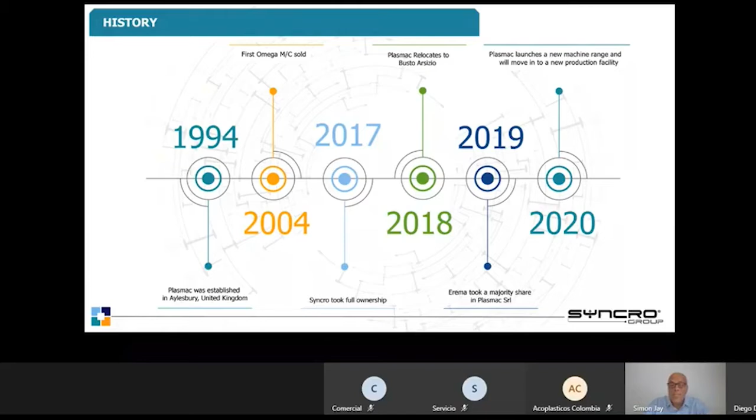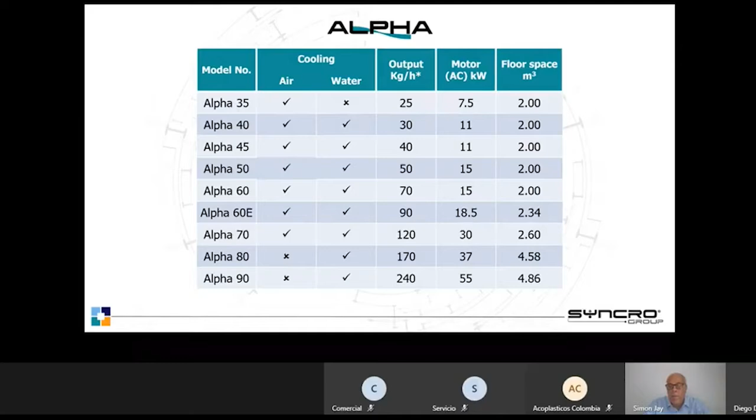In terms of our current product range, we have 2 machines: the Alpha and the Amiga. I'd firstly like to take you through the Alpha machine. The Alpha machine comes in a number of different sizes, from the Alpha 35 up to the Alpha 90. The Alpha 35 is an air-cooled pelletizing machine only. The Alpha 80 and 90 are water-cooled only due to their outputs, but the other machines in between can be either air or water cooled depending on the material we are repelletizing. The outputs go from 25 kilos an hour max on the Alpha 35 up to 240, 250 kilos an hour max on the Alpha 90, but we can also go down as low as 4 to 5 kilos on the Alpha 35. The machines have a very broad processing window.

All of our machines are based around what we call our dual diameter screw technology. This short screw technology has a number of different benefits. One of the key ones is the output per kilowatt of installed power, and we would typically expect to see an output between 3.5 and 5 kilograms per kilowatt, or 0.2 to 0.25 kilowatts per kilogram. Because of our screw design, we have low shear, minimum dwell time within the screw, and therefore the absolute minimal material degradation. It also means the machine has a very small footprint, saving valuable floor space. We call this a direct extrusion machine, meaning we don't need any prior size reduction before we feed the material into the screw. So as you will see on the top left-hand photo, we're feeding the roll material directly onto the screw as well as the trims.

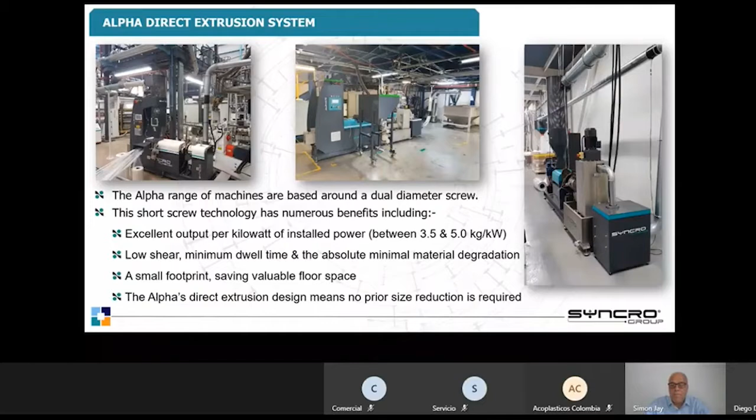We feed the material into the larger feed section. This allows us to get the material, which has a very low bulk density, into the screw. We then compress it through the taper section, and then go into the 8:1 portion of the screw, where we compress it further and then meter it up to the die.

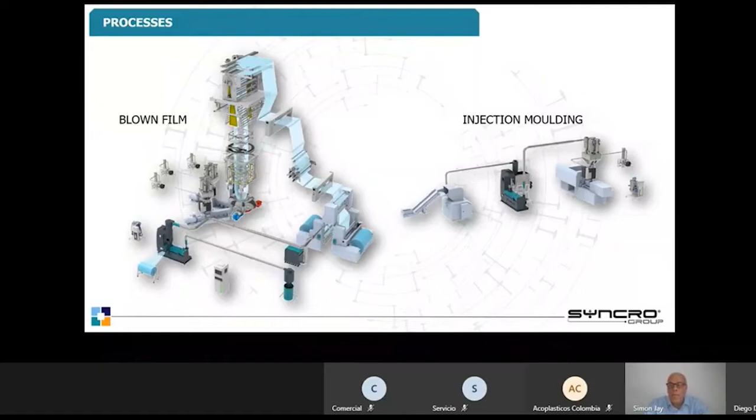The Alpha machines are typically used in blown film processes for inline reprocessing of trims and reels, and also in injection molding processes for either inline or offline applications, where you can feed the material into a granulator, repelletize it, and then feed it directly back to the injection molding machines. Over and above this, our machines are used on cast film lines. Alphas have been used to recycle pipe and many other different products.

I'd like to take you through a couple of case studies for the Alpha. The first is for a blown film application. This customer produced stretch film for both industrial and agricultural applications.

So they produce silage wrap for the agricultural industry and machine and hand wrap for the business-to-business industry. They're a well-established company within the stretch film market, and they've been at the forefront of development for many years.

They basically said to us that they needed a compact, efficient, standalone system capable of handling their trim and reel scrap. They ran trials at our factory and we proved the solution to them.

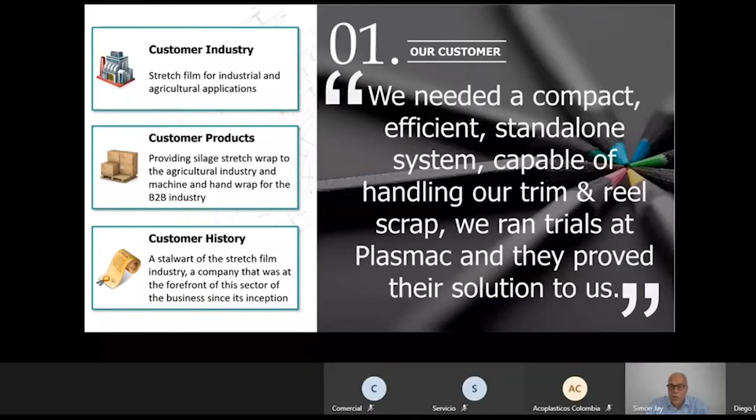The customer produces high-speed stretch film at speeds up to 150 meters a minute, and they were recycling this scrap using an older repelletizing line, which was producing a lot of dust and limiting their output. The dust from the recycling process was causing them housekeeping issues, and the output was limiting their line speed.

Added to this, they were looking to increase the reliability and uptime of their system. By replacing the equipment with a new high-efficiency, low-energy system, this meant that they could increase the output of their line and get their return on investment justified.

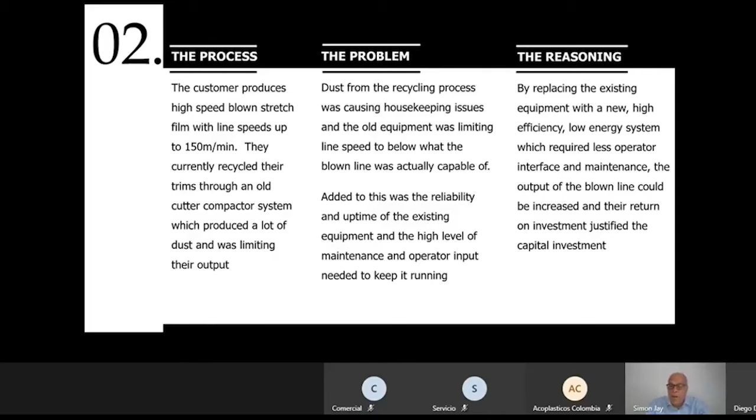Their goal was to reduce their downtime by 20%, increase their line speed by 35%, and increase their energy efficiency by 20%, whilst keeping the operator interface to a minimum.

What we proposed to them was an Alpha 70 air-cooled machine, an air-cooled pelletizer with a trim basket, a roll feed unit, a manual screen changer, and an air-cooled pelletizer. The customer typically ran metallocene with linear, low densities and LD blends, with or without PIB, and metallocenes with linear, LD and plastomers.

We installed the machine, we commissioned the machine for them, and we fully trained all of their shift operators and have provided ongoing backup and support since.

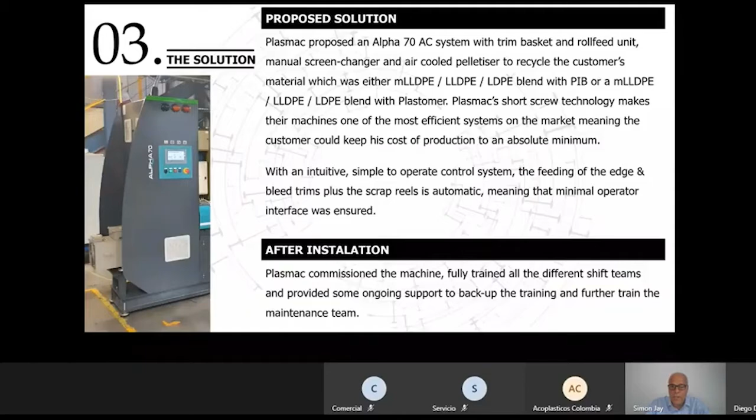Their feedback was that the Alpha machine met all of their needs and then some. The operators like it because they can forget about it, it simply runs, and Plasmac have gone above and beyond to support them, justifying their decision to purchase from us. But most importantly, the return on investment figures.

The customer had an output of 630 tonnes a year of scrap material. Their cost of production was 15 euro cents per kilo. So basically it was costing them 94,500 euros to recycle their scrap.

By investing in the new Plasmac machine, they were able to reduce their cost of production down to 11 euro cents per kilo, and they were able to increase their production by 395 tonnes a year, giving them a total saving of 98,000 euros. This basically meant that the machine paid for itself within 1 year.

Over and above this, they were able to reduce their downtime for maintenance, increase the blown line output, reduce their energy costs, improve their working environment, free up valuable floor space, remove the dust, and most importantly, increase their efficiency.

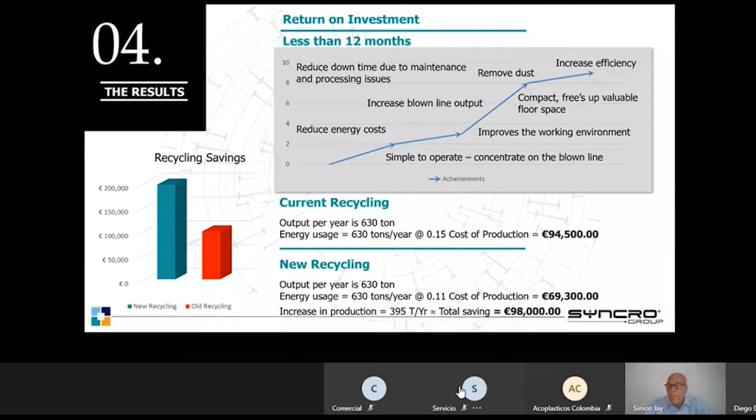The second case study I'd like to show you is from an injection moulding application. This customer supplied automotive parts to the automotive industry. They provided just-in-time products with zero defects, and they've been a supplier to their industry for over 20 years.

Purchasing the machine was a no-brainer, they told us, after proving the process, justifying the decision was easy. Basically, they were feeding all of their scrap material into a granulator, and this was either fed back directly into the injection moulding machines or sent away for pelletizing.

Dust from the granulation process would cause issues when they fed it back directly. It would cause bridging in the feed throat, or it was causing them defects on the surface of the product. They also had some metal clips that they couldn't always remove, and when this was shredded, they'd often get small metal contamination within the products.

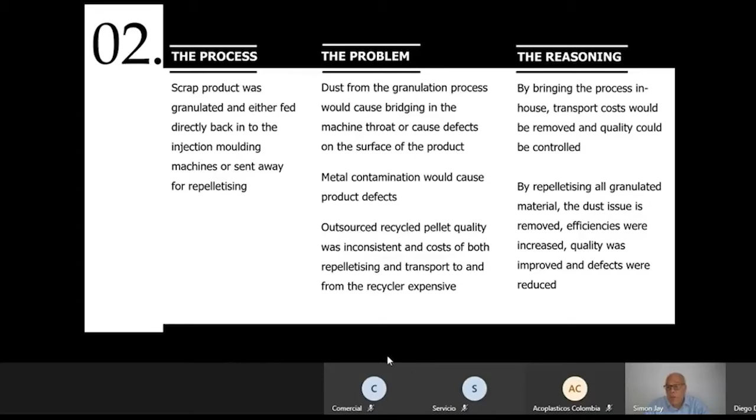The final issue they had was that the outsourced recycled pellet quality was both inconsistent, and it cost them a lot to transport and pay for this recycling. By bringing the process in-house, they hope to remove those transport costs and improve their quality, and by removing the dust, they can increase their efficiency and reduce their defects.

The goals that they set us were to increase their efficiency by 20%, reduce their defects by 15%, and reduce their recycling costs by 50%, again whilst keeping the operator interface to a minimum. Here you can see an example of the product that they actually injection moulded, which was the car dashboards.

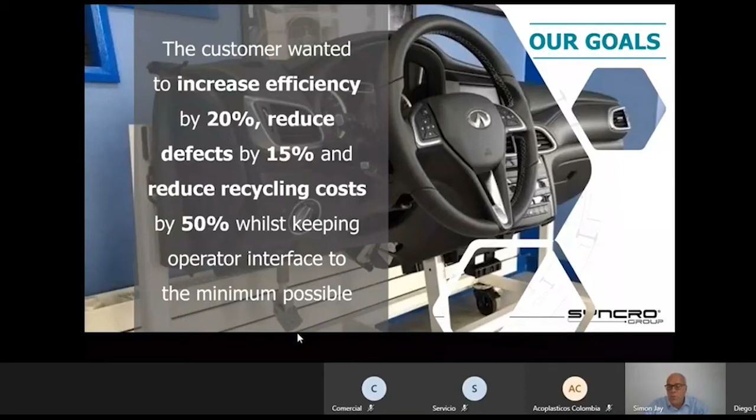Again, we proposed to this customer an Alpha 70, but this was a water-cooled system with a flake feeder, a manual screen changer, and a water pelletizer, as they run polypropylene with 30% calcium carbonate.

Again, we help to train their technical staff, we've provided them ongoing backup and support, and we give them further understanding so that they can give a seamless handover to their production team.

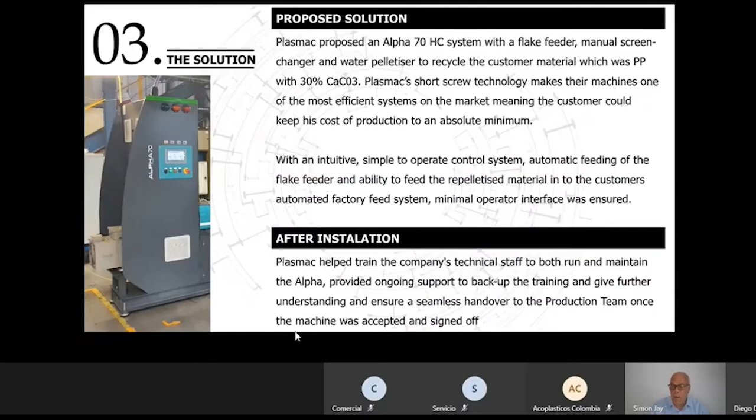Their feedback was that the Alpha machine exceeded all of their expectations. It's simple to operate, incredibly robust, and we can simply leave it alone to run. When we've needed support from Plasmac, they've been on hand to help and guide us for our issues.

The return on investment for this project was even more impressive. This customer was paying €350 per tonne to externally recycle 540 tonnes per year, costing them just under 190,000 euros per year to externally recycle. This didn't include the cost of transport.

When they brought the process in-house, their cost of production was 23 euro cents per kilo, which meant that their in-house recycling costs were 124,000 euros. This meant the machine paid for itself in less than 8 months. These cost of production figures include the machine cost, the electricity cost, the labour cost, and any finance costs.

The next product I'd like to talk to you about is our Powerfeed system. The Powerfeed system is a pneumatic trim conveying system to convey the trims from the winder to the trim basket. Plasmac takes full turnkey responsibility.

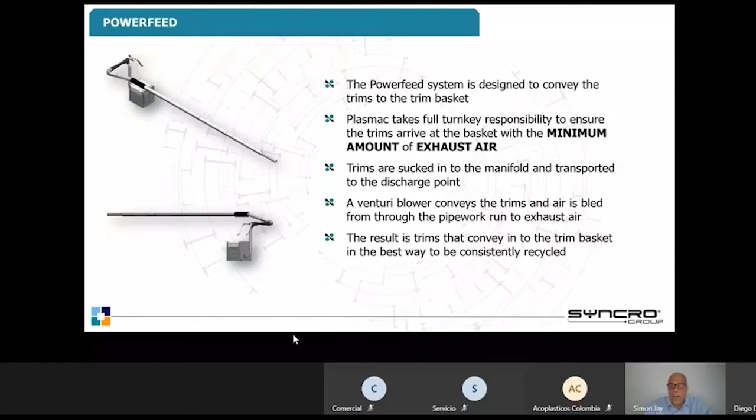Trims arrive at the basket with the minimum amount of exhaust air. Trims are sucked into the manifold and then transported to the discharge point, which is normally the trim basket. A venturi blower conveys the trims, and the air is bled through the pipework to basically get rid of the exhaust air. The result is the trims convey into the trim basket in the best way possible for us to then recycle it.

When used in conjunction with a Plasmac recycling extruder, we will remove the air through air diffusers as we go down prior to the trim entering the basket. Unlike competitive systems, which are basically just concerned with moving the trims from A to B, from the winder to the discharge point, Powerfeed is designed to deliver the trims with the absolute minimal amount of exhaust air. So Plasmac is the only machinery supplier that can offer a turnkey, integrated trim conveying and recycling package.

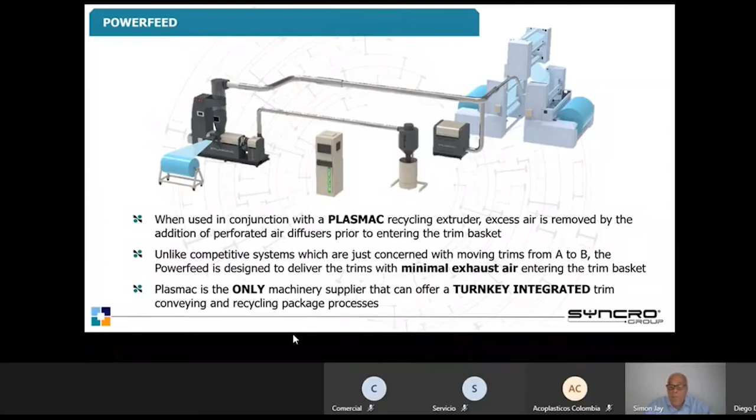Our second big product is the Omega Shredder extruder machine. This comes in 4 sizes. We have the Omega Eco, the 150, the 180 and the 250. The Omega Eco and the Omega 150 can be either air or water cooled depending on the material being repelletized. The Omega 180 and the Omega 250, due to their outputs, are water cooled only.

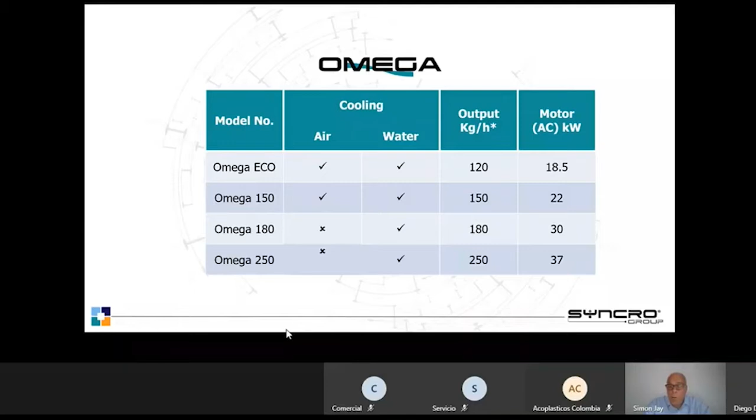The Omega machines are a one-step process. They're basically able to handle a very wide variety of different forms of scrap material. Using the same dual diameter screw as the Alpha, but with an enhanced geometry and a longer L to D ratio, they can basically handle any form of scrap - loose material, slabbed material, reels, purgings, startup scrap, raffia bags, any form of product.

The integrated shredder incorporates a unique screen design. It has a low-speed rotor and generates virtually no heat or dust, meaning the absolute minimum of gels. The size-reduced material is fed into the extruder via a variable speed auger, and again we have market-leading outputs per kilowatt of installed power, even below 0.2 kilowatts per kilogram in certain instances.

Again, because of the same screw design as the Alpha, it's low shear, minimum process dwell time, and the absolute minimal material degradation.

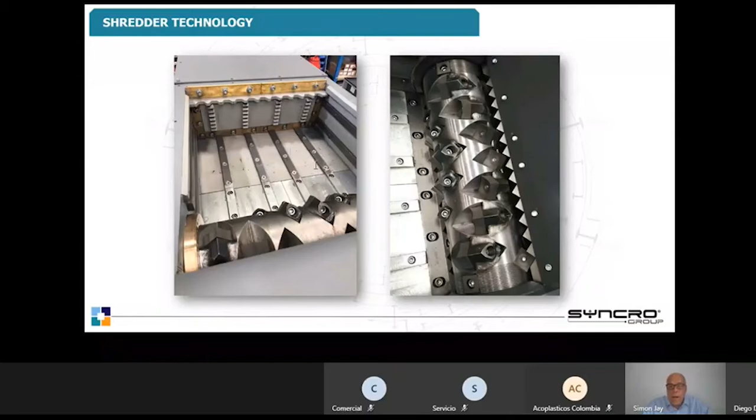These are 2 pictures of the shredder rotor and the fixed blades. On the left, you can see the shredder rotor and the ram. The ram pushes material onto the rotor, and is controlled by the load that we're measuring on the rotor itself. As the load decreases on the rotor, the ram will push more material onto it. On the right-hand side, you can see the rotor itself with the teeth and the 2 sets of fixed head blades.

On this slide, you can see the rotor above the feed auger. Basically, once the material has gone through the shredder, through the rotor, it falls onto the feed auger, and then we use the feed auger to dose the material into the extruder.

On the right-hand picture, you can see our screen design. Unlike a traditional shredder where you would have holes, our screen design has what we call a letterbox opening. We're simply shredding the material enough that we can feed it into the auger. We're not shredding it down into a very fine powder or dust where that would itself generate gels.

You'll also notice that there's no cooling water needed on the shredder at all. You can see here on the right hand side the taper barrel leading into the extruder. Absolutely no cooling water needed. This means again we can have an incredibly energy efficient machine.

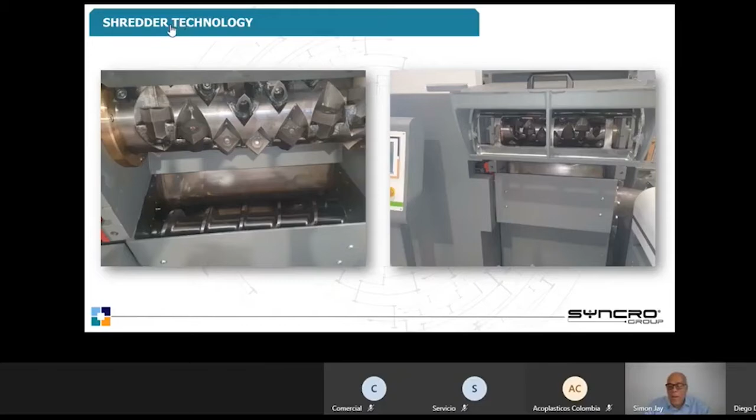We can put vacuum degassing on the Amigas, and we can also do this on the Alphas if necessary. Vacuum degassing would be used for printed material, or if there's some surface moisture, or if it's a biodegradable material which is hygroscopic, for instance. The degassing allows us to remove any steam or volatiles, and because it's a vented system, this means the screw length does increase, and this would typically be a 26 to 28 L to D ratio screw.

We also offer a range of screen changers, from a manual screen changer all the way up to hydraulic, manual backflush, or fully automatic backflush. If you're running an inline system, we wouldn't normally recommend a screen changer. If you have an offline system, or you're running reels on an Alpha, then we would recommend that a screen changer is fitted. For most applications, our manual screen changer is sufficient, but if a customer is running a more contaminated material, then we can happily offer the other options.

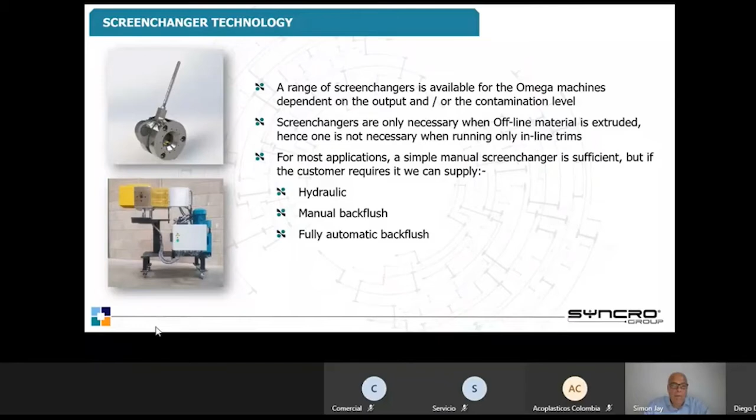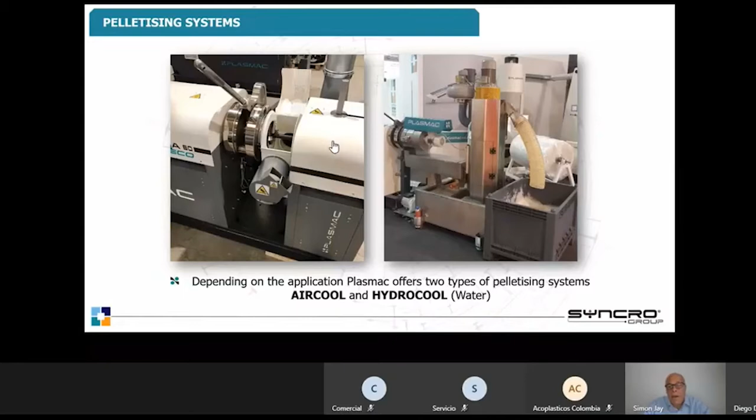As with the Alpha, we do 2 pelletizing systems. On the left, you can see our air-cooled pelletizing system, and on the right, a water-cooled pelletizing system. Amigas tend to be more commonly fitted with a water-cooled system.

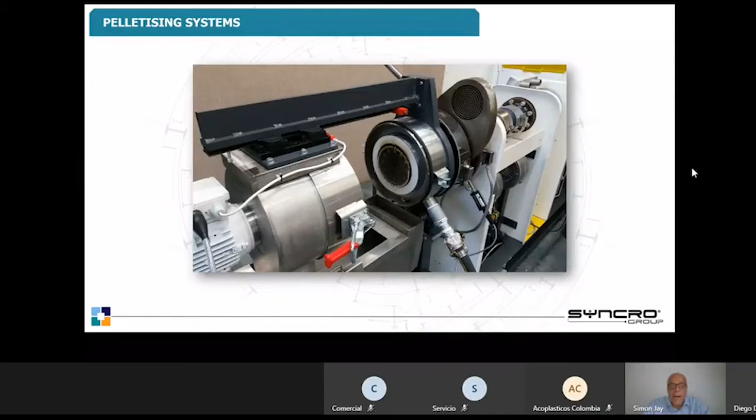Here you can see a good example of one. We have 2 pumps. One pump pumps the water into the collector where we do the pelletizing. The second pump pumps the water for a heat exchanger and into the tank to keep the tank temperature at a constant level. The collector is fitted onto a linear rail that you can see on the top for very easy opening and easy maintenance. It's a simple yet very robust system.

Again, I'd like to take you through a couple of case studies on the Amiga. The first was for a blown film customer that basically produces film for the construction and retail industries. They extrude, print, and produce bags in-house. They were established nearly 90 years ago. It's a family-owned business that concentrates on niche and specialty applications.

They needed a flexible machine to handle all of their scrap materials from startup to production scrap. They purchased an Alpha from us in 2015 that ran without issues, and their next step was to move up to an Amiga. The customer produced a lot of roll scrap, but also bag cutout scrap, and they were currently sending all of their material off-site for reprocessing.

Their brand owners were pushing them to include more recycled material into their products, so they decided to bring their recycling in-house. Their main issues were the quality of the recycled pellet that they were getting externally and the cost for pelletizing and transport.

The customer also wanted to run mainly roll films, and this was very high slip film. So they wanted to be sure that our roll feed would be sufficient to be the only way that they fed material into the machine. By installing the machine in-house, they could remove the transport costs and ensure their quality, and it also meant they could meet their brand owners' requirements of including a higher level of reclaimed material.

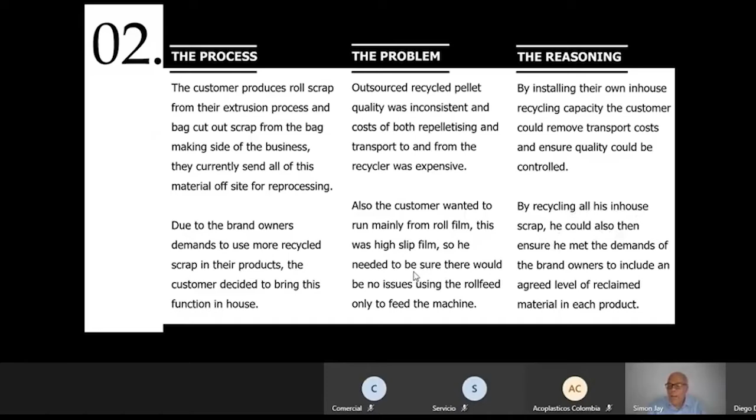This customer set us goals of reducing their recycling cost by 40%, allowing them to increase their recycled content by an additional 20%, and bringing their quality control in-house. They wanted a simple installation with a machine that required very little operator interface.

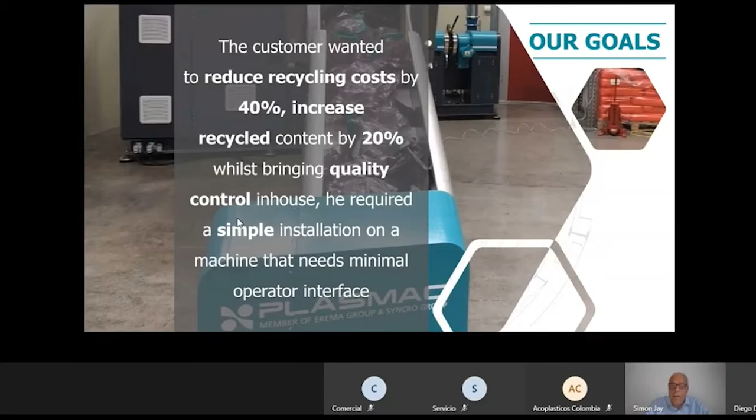For this customer, we supplied them an Amiga Eco air-cooled system with an elevator, an integrated metal detector, plus a roll feed unit. It had a manual screen changer and an air-cooled pelletizer. The customer mainly ran low density, linear low density with some metallocene blends, but they also added up to 10% polypropylene to improve the film properties. Again, we commissioned the line and fully trained the customer on the operation of the machine.

The feedback from the customer was that the Amiga machine allowed them to bring all of their recycling in-house. It's simple to operate - they can run it from either the elevator or the roll feed, but on most occasions the operator simply fills up the roll feed stand and leaves it to run. They were very happy with the original Alpha machine, and the Amiga is performing just as well.

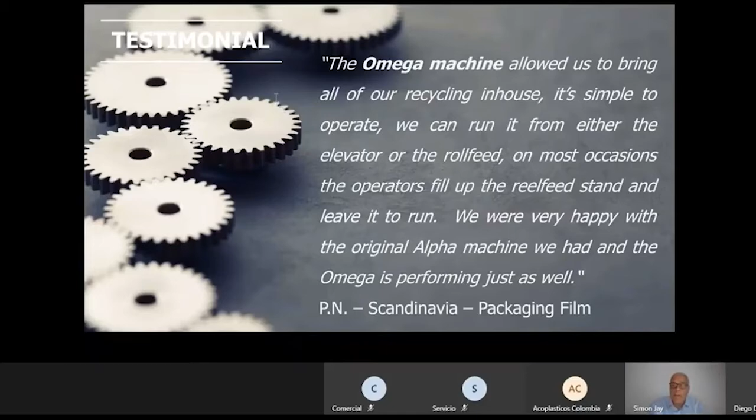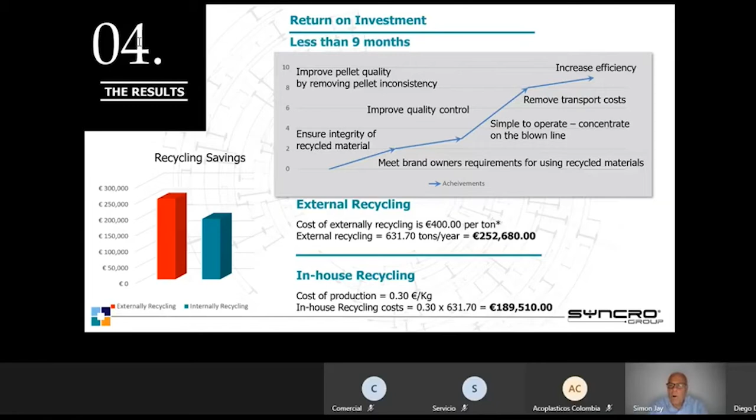The return on investment figures for this customer showed that they were paying €400 a tonne to recycle externally. They were recycling 631 tonnes a year, so this was costing them just over €250,000. By bringing the recycling in-house, their cost of production was €0.3 per kilo. That meant that they were paying just under €190,000 to recycle all of their material, meaning that this machine paid for itself in less than 9 months. They also were able to increase their pellet quality, remove the inconsistency, increase their quality control, ensure the integrity of their recycled material, but most importantly, they met their brand owners' requirements for using more recycled material.

The next case study I'd like to take you through is a laminated film case study. This customer provides packaging to the food and beverage industry. They provide barrier packagings as well as laminated packagings of polyethylene and aluminium. The customer was established in 1850. It has 8 manufacturing sites and over 1,800 employees. You can see their products on the right-hand side. This was basically 50% aluminium and either 50% barrier film or 50% PE film.

What they said to us was, as part of their commitment to the circular economy, they needed to find a system to allow them to recycle their high barrier film and the aluminium laminates. Plasmac ran trials and showed us that they could do it.

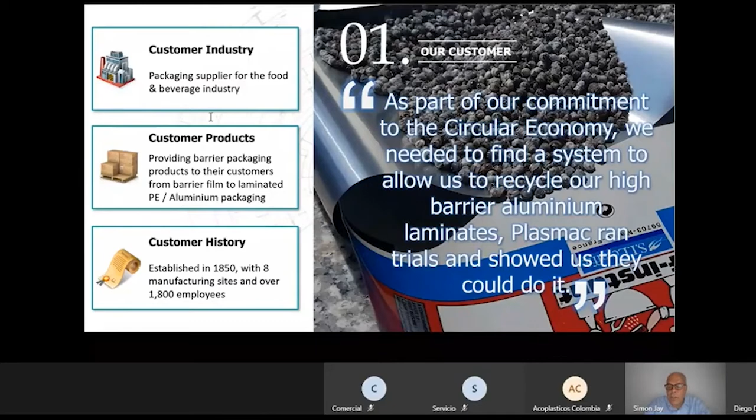The customer produces aseptic packaging by laminating aluminium to PE or to barrier films. They were producing startup reel scrap and out-of-specification reel scrap, which they were currently sending away to landfill. The customer, as part of its commitment to the circular economy, and also their major customer brand owners, were very keen for them to stop sending material to landfill, and they wanted to find a way to reprocess the scrap material in other applications. Up until this point, this material was considered unrecyclable.

The customer had found a partner in the injection molding industry, and they agreed to work together to find applications for the new recycled material. By recycling the material, the pair developed products that could incorporate a viable percentage of this polyethylene-aluminium recycled pellets.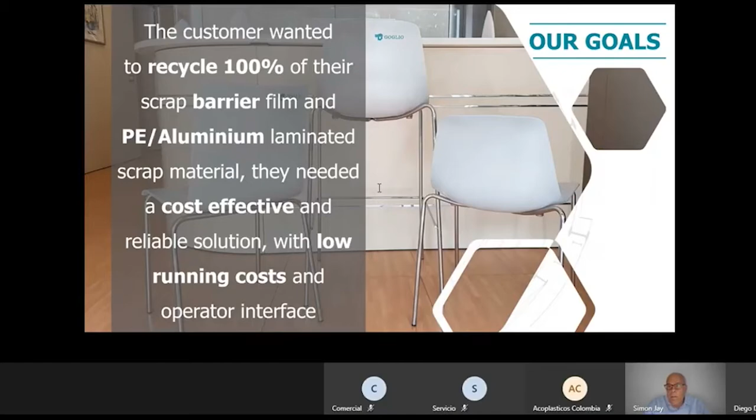The customer's goals were to recycle 100% of their scrap product, of their barrier film and PE-aluminium laminated material. They needed a cost-effective and reliable solution with low running costs. You can see a picture of the two chairs - the seating part of the chairs are injection molded from this recycled aluminium-polyethylene material.

For this customer, we proposed an Omega 250 HCV system with a roll feed and an elevator, a manual screen changer, and a water pelletizer to recycle the material, which is 50% PE, 50% aluminium. We helped train the company, gave them lots of ongoing support, and helped them fine-tune the material so that it ran perfectly in the injection molding machines.

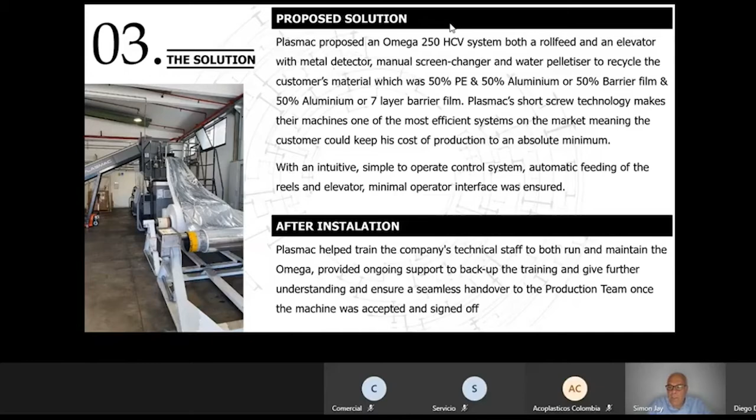On this slide you can see another product that they injection mold - these are end caps for their reels. They also injection mold pallets and the side panels that they put on either side of their reels when strapping them to the pallets.

Their feedback was that the Omega machine was exceptional. They're repelletizing all of their scrap material. It's simple to operate and very energy efficient. Thanks to Plasmac, they were able to meet the needs of their brand owner and reach the goals of a circular economy business.

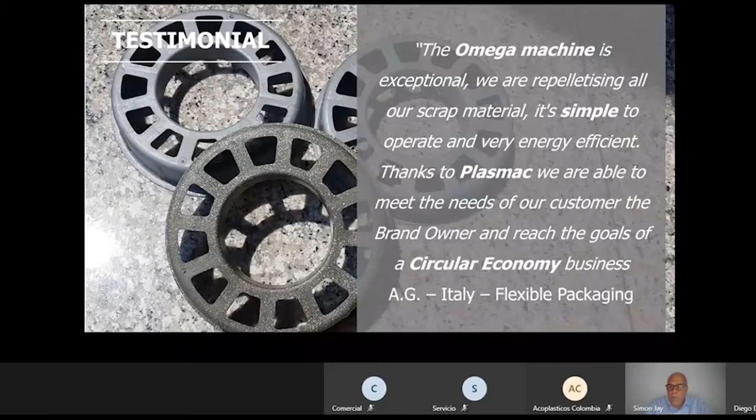These are a few examples of some machines in operation. The top left-hand corner is an Omega that's used by an injection molding customer.

The top middle is an Omega Eco water-cooled for biodegradable film. This customer is recycling all of the bag cutouts.

The top right picture is a bubble film manufacturer. They have an Omega Eco air-cooled and they recycle the reels or their trims.

The bottom left is a customer that takes startup scrap from all of the other blown film businesses within his area, and he repelletizes all of the material and uses it to produce garbage or can liners.

The bottom right hand corner is an Omega 250 that's actually installed in Mexico at JEP or GEPP, who are Pepsi Cola's packaging supplier. Here they have an Omega 250 and 3 Alpha 60 machines.

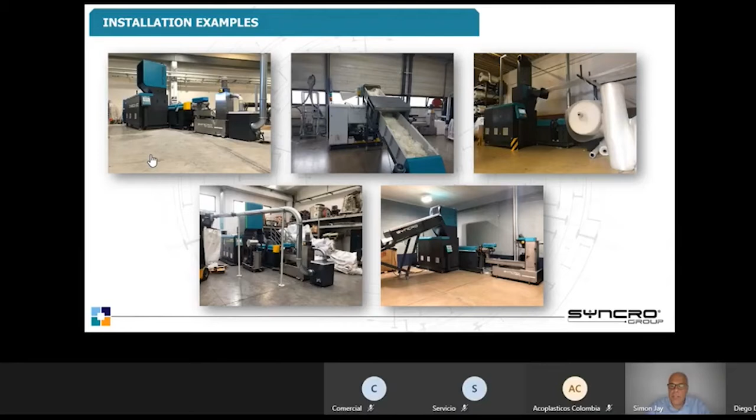Now I'd like to take you through some of the latest developments of the Syncro group. Syncro produce dosing units, both batch and continuous. They produce automatic air rings, supervisory systems, IBC systems, centralized conveying systems, and gauging systems for both blown and cast film.

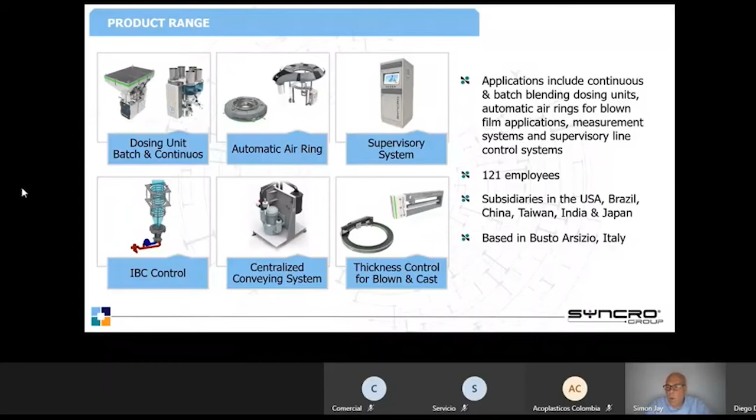They have 121 employees and growing, and subsidiaries, as I showed you earlier, all over the world, and they're based in Busto Arsizio near Milan, Italy. I'd like to take you through 4 of their products.

The first one is called SmartdraYn. A question is, how much does it cost to change the product on your extrusion line if you're making a product change from one to the other? How long does it take you to drain the material?

How do you handle that drained material? How do you keep the working area clean? How do you avoid blender contamination? How do you stop your material being lost? And how do you reduce your scrap production?

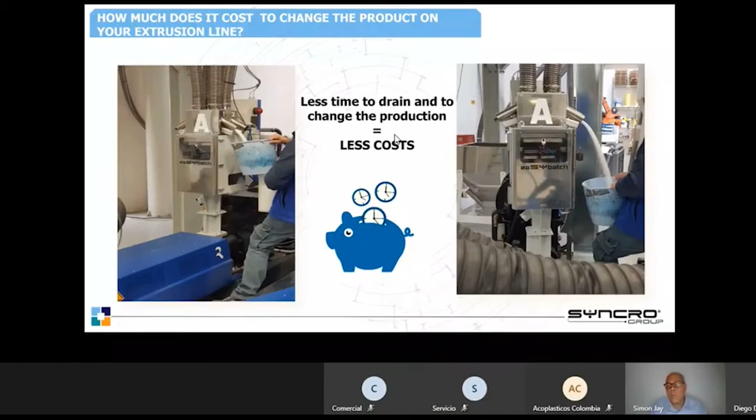The less time to drain and change the production basically means less costs, and it also means you have a more efficient machine because you're up and running more quickly. Also, by stopping material falling around the machines, you're making a much safer working environment for your employees.

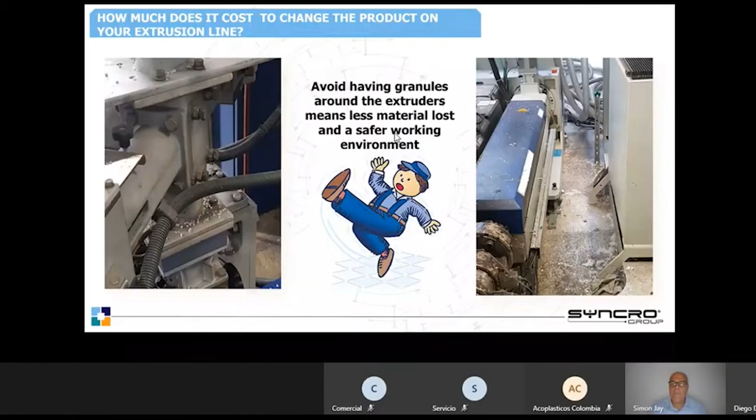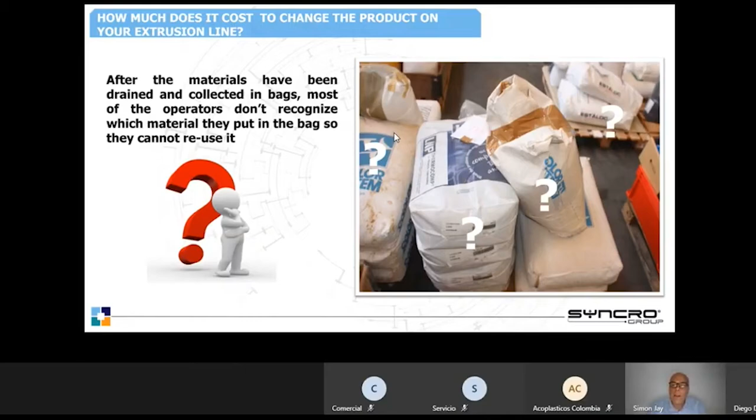One of the biggest issues, the operator drains each of the blenders or each of the components of the blenders, and they put it in bags or bins, but then they forget what material went into which bucket or which bag, and basically that material becomes scrap.

One of the key initiatives of the EU Circular Economy Action Plan is preventing pellet loss during the cleaning operation. Again, SmartdraYn is a fantastic system to allow you to meet the Circular Economy Action Plan.

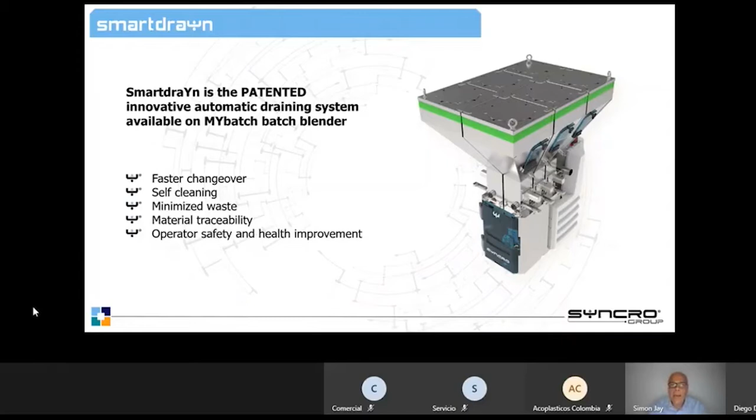SmartdraYn is a patented system from Syncro. It allows fast changeover, self-cleaning, minimised waste, material traceability, and an improvement in operator health and safety.

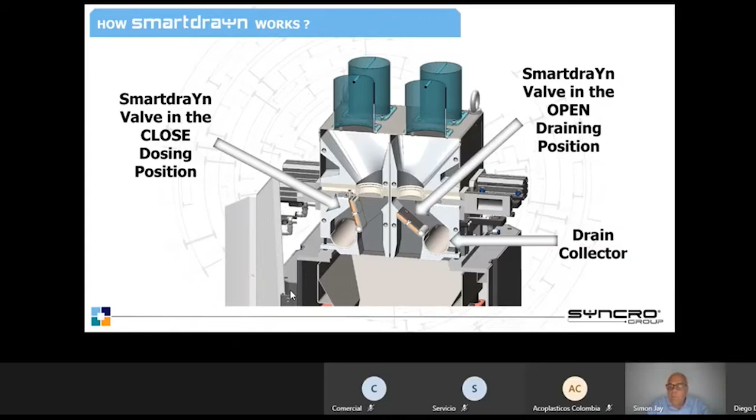Here, the blenders are draining into the drain collector, and a vacuum system then transports the material away to be bagged or put into day bins.

You can have single or multiple pickup points depending on the level of investment that you wish to make. A single pickup point basically would drain each extruder and its blenders in turn to a single pickup point. The operator, once one component has drained, would then swap the bag or the bin for the next one and drain that material directly into the bag or bin.

Or you can have multiple pickup points where you can drain all of the extruders at the same time. This makes for an even quicker changeover between products.

On each of the pickup points, there is a QR code printer. The QR code printer prints a QR code adhesive label. That adhesive label can then be stuck on the bin or the bag, so you have complete material traceability.

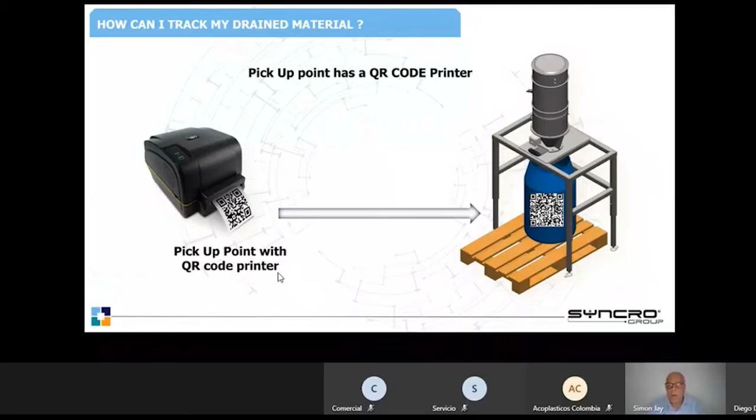If you're draining some of the additives that go into blown films, stabilizers, etc., these are incredibly expensive materials, and by avoiding having to scrap them by not knowing which they are, this means you get significant savings.

Looking at a return on investment example, if you did 300 product changes per year, you would save approximately 120 hours. The production over 120 hours on a medium capacity line could be as much as 72 tonnes per year. And if you took a 10% margin, that would give you a €7,200 per year return.

The material loss could be around 720 kilos per year. And the purge time savings could be as much as 24 tonnes per year. This would give you a saving on raw materials of over €37,000.

The cost of the SmartdraYn system on a 5 extruder, 4 component machine would be approximately €20,000, and with the savings of €44,000, that would mean the machine would pay for itself within less than 6 months. It would help you meet the circular economy goal of no pellets into the environment.

It would increase the safety of the working environment, it would save you raw materials, and it would increase your production efficiency due to quicker changeovers. Reduce purge times to swap products, and you ensure that there's no material contamination. Basically, it allows you to make more profit.

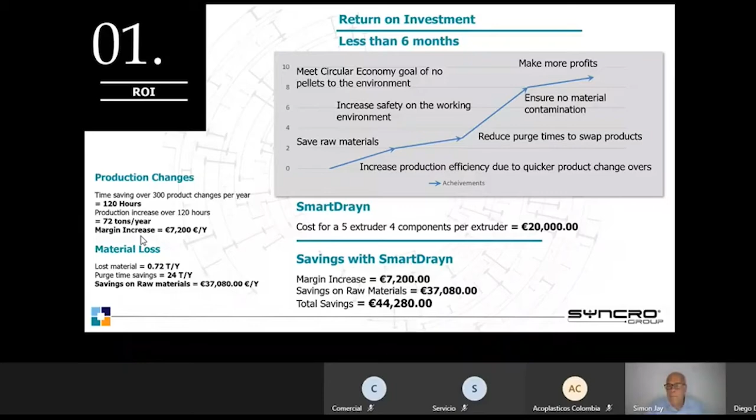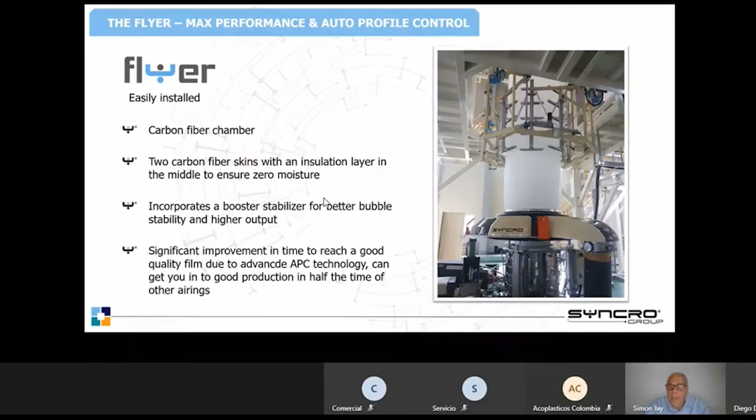The second product I'd like to take you through is the Flyer and the Vortex. The Flyer is a triple lip airing, a carbon fibre dual skin airing, which means because of the carbon fibre, you get no moisture generation due to the cold air that you're pumping into your airing and your IBC. It gives you a significant improvement in the time to reach a good quality film due to the advanced automatic profile control technology, and can get you into good production in half the time of other airings.

It's targeted at LD, linear, metallocene based films. As mentioned, it's a triple lip airing. Two of the lips are facing upwards, as in a standard dual lip airing design, but the third is pointing downwards, and with the unique IBC design, this gives you significantly increased outputs. This airing can go on die diameters from 60 to 850 millimeters, blowout ratios of 2 to 4, and thicknesses from 20 or below up to 160 microns. It has a vertical height adjustment of 450 millimeters.

Some examples of the products in production. So an FFS application, a die of 180 with a lay flat of 480 millimeters, 160 micron film. Here we would expect to see an increase in output of between 30 to 50%. If you were to supply Syncro your material recipes, they will actually put those output increases as guarantees in writing.

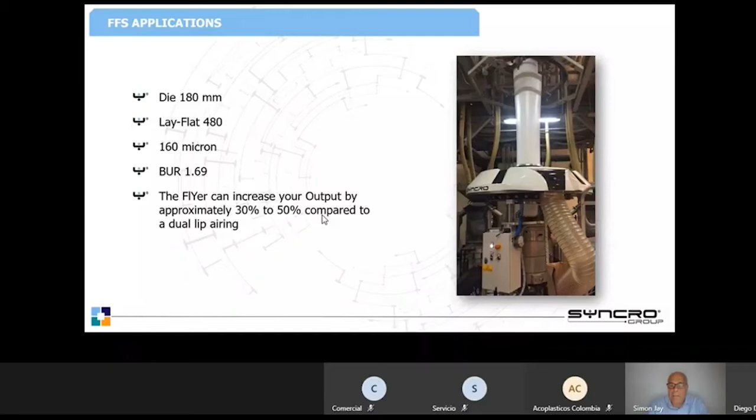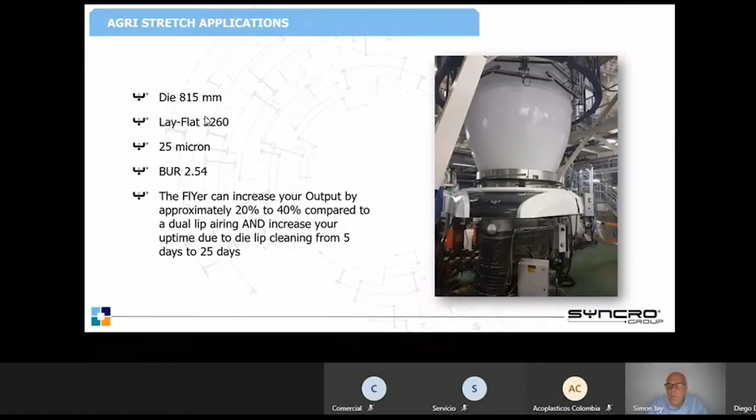An agri-stretch application is even more impressive. Here with an 815mm die, a lay flat of 3260 on a 25 micron film, you could see increases of between 20 and 40% in output, but the key one is that you also reduce the time required to drop the bubble to clean any PIB puddles on the airing inserts. This can be increased from 5 days to 25 days. So rather than having to drop the bubble every 5 days, you would only have to drop it just under once a month. This gives significant savings.

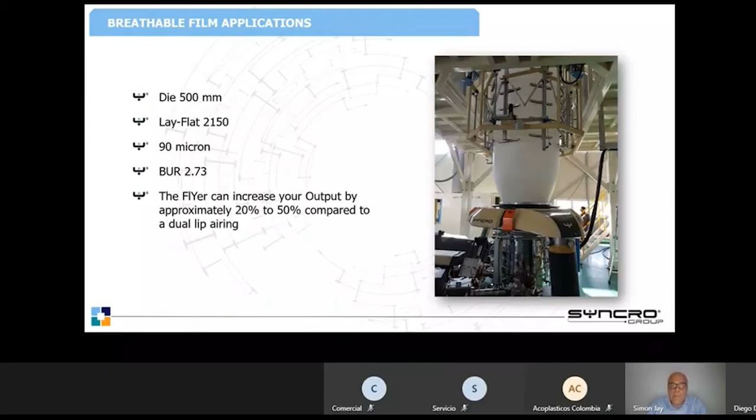For breathable film applications, a 500mm die, you can see the different characteristics there. Here you would expect to see a 20 to 50% increase. And for general purpose films, just taking a standard one of a 450mm die, 1800 lay flat, 55 micron, you can see anything between a 20 and an 80% increase in output.

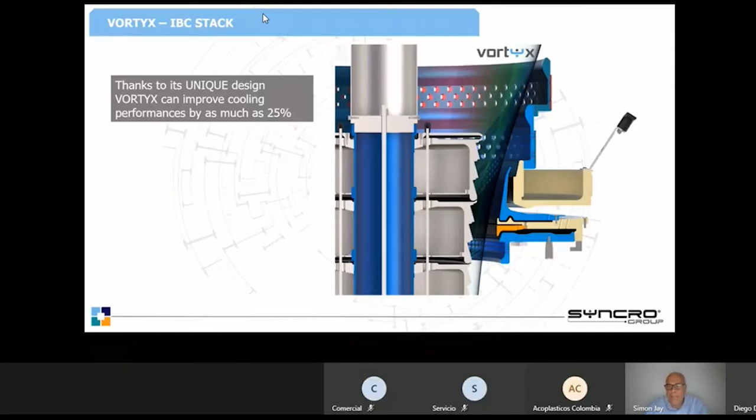What also comes with the flyer is the Vortyx IBC stack. This is a unique design that can also improve cooling performance by as much as 25%. On a standard IBC, air is blown onto the inside of the bubble, and this air will adhere to the inside bubble surface, and as the bubble travels up, that air will heat up and it will basically stick to the inside of your bubble, insulating it from the cold air that you're pushing in.

The Vortyx design has ridges up the outside of the stack, and this causes what we call turbulent microflows. These turbulent microflows break up the laminar airflow on the inside of your bubble, and basically mean that you're always pushing cold air into the bubble itself, into the plastic itself, and this gives you this 25% increase in cooling efficiency.

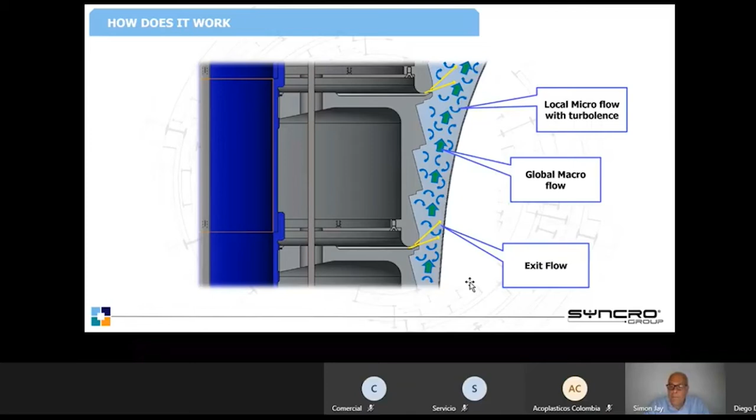Because we're causing this turbulent flow, this micro-turbulent flow will then cause any monomer drops that blow up from the die lips to basically be broken down into micro drops, and these are then exhausted through the IBC stack. Any monomer that does drop down towards the lips is then captured through a vacuum system on the bottom of the IBC and a foam insert, which basically will collect all of that PIB and stop it forming puddles on the bottom of your lip sets. And that's what allows you to increase the uptime from 5 days up to 25 days.

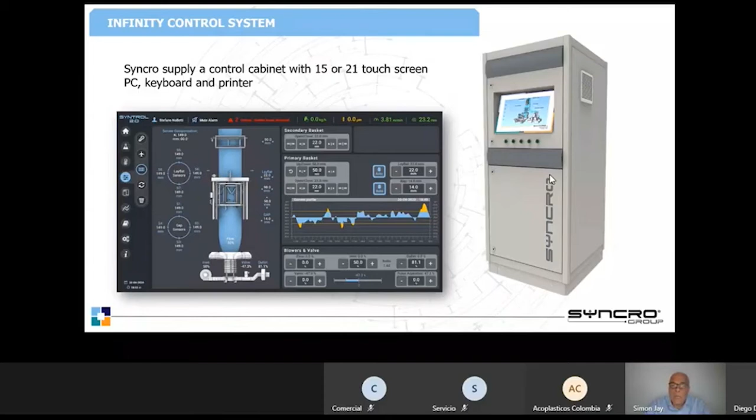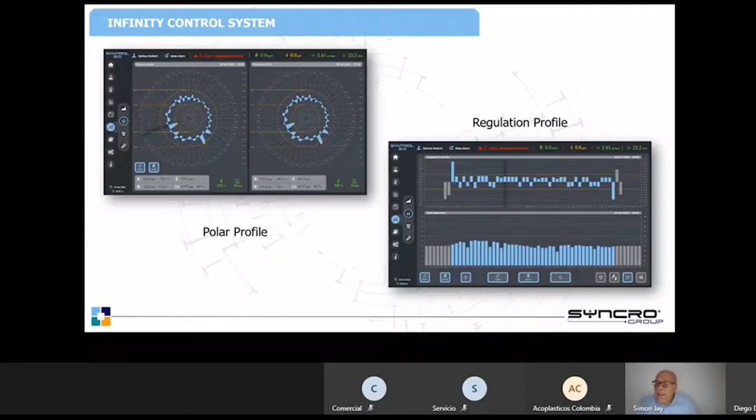The flyer and the Vortex come with a control system called Infinity. It's either a 15 or 21 inch touchscreen, PC, keyboard, printer, and as with all control systems, you have all of the functions that you need to run the line: startup profile, actual previous, 2 sigma trends, polar profiles, the regulation profile of your APC system, your temperature control for your line, and your dosing recipes.

With the flyer, we found that you could increase production on a mid-size line from say 550 kilos an hour to 710 - that's a 30% increase in output. That would give you 960 tons a year of increased output. If you took a margin on that of 10%, that would equate to 96,000 euros. The time to reach good production is taken down from about 30 minutes to 15 minutes. This would give you less scrap material worth significant annual savings.

If you took that scrap material as having a 50% value of virgin, that would save you 32,000 euros a year. The cost of a flyer, Vortex and the control system is approximately €120,000, meaning that system would pay for itself in a year.

The key there is less production scrap equals less wasted material, a clean, safe working environment around the die due to the single chamber inlet for the air. You save raw materials, you increase the production output of your line, basically you make more profits.

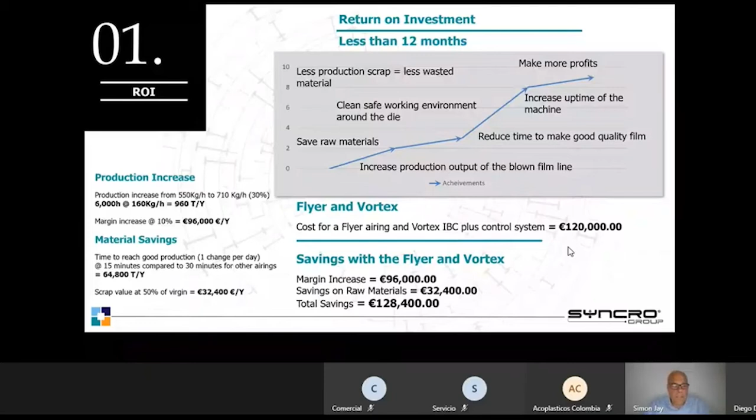The next product I'd like to take you through is the iron flat. There are three key features to high quality film. Profile distribution, or 2 sigma, this is improved by your automatic profile control system. Width tolerance, this is improved by your IBC with lay flat control.

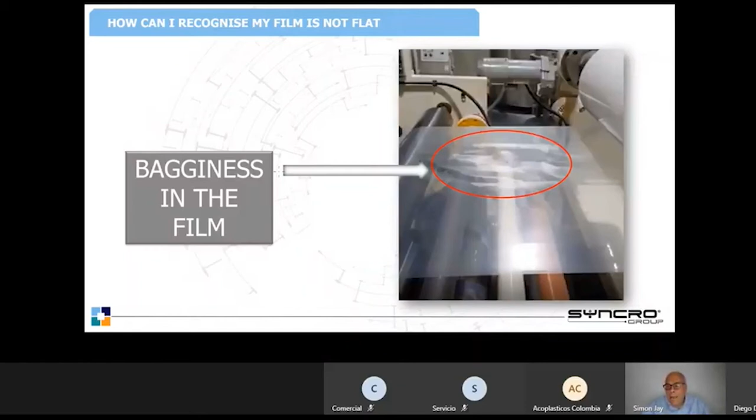We have what we call the iron flat. The iron flat we consider to be the third revolution in blown film design. The first revolution was oscillating haul-offs to randomise thickness errors. Then came the automatic profile control to improve the gauge control on the blown lines.

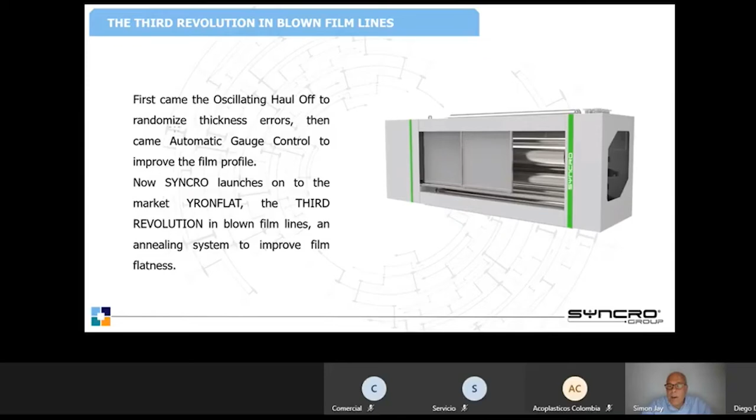We now consider the YRONFLAT to be the third revolution, and this is basically an annealing system to improve film flatness. It's a standalone annealing system for blown film lines, and basically it improves the film flatness, reduces camber, and allows you to increase printing speed, printing quality, and lamination performance.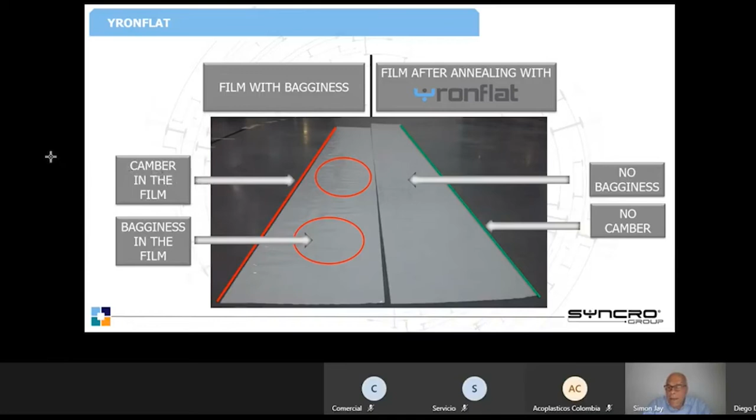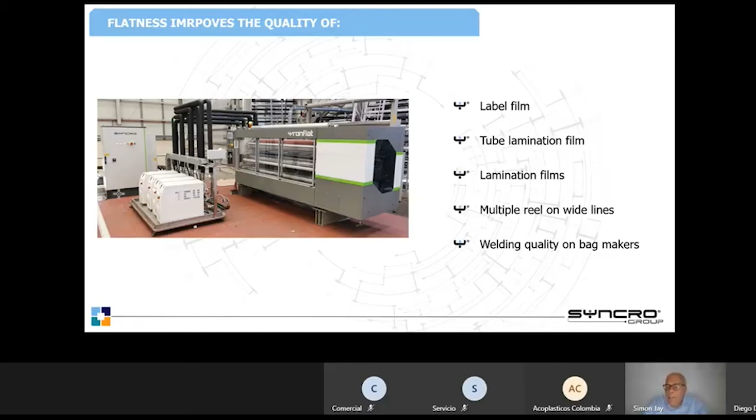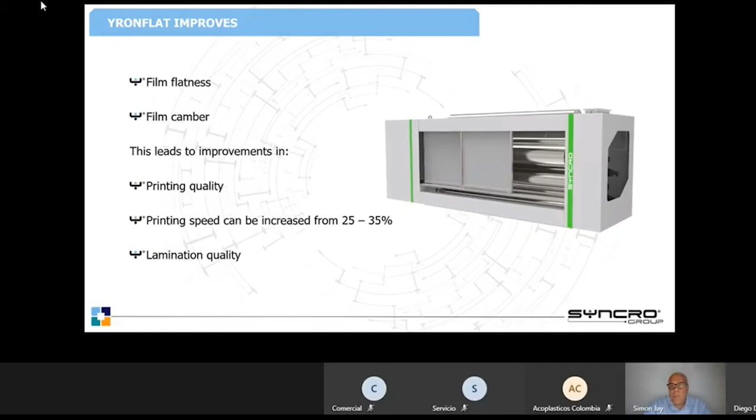A Yronflat is great for label film, for tube lamination film, for lamination films, for wide lines with multiple reels, and for bag making film, for the welding quality on bag makers. Basically, it improves the film flatness and camber, and this leads to improvement in printing quality. Printing speeds can be increased on your printers by 25 to 35%, and it increases lamination quality.

The key features: it has a semi-automatic web threader. The operator uses a chain to feed the film through the system. It has 4 thermo-regulated motorized rollers. It gives you maximum flexibility for preheating, stretching and cooling. The inlet can be either horizontal or vertical, and it has a fully adjustable cord length or stretching gap.

That you control via the software and recipe storage. There's no negative influences on the profile because there's minimal stretching, and it's available for film widths of 1200 millimeters up to 3000 millimeters. Here you can see an example of the inlet being vertical or horizontal, and the outlet also being vertical or horizontal.

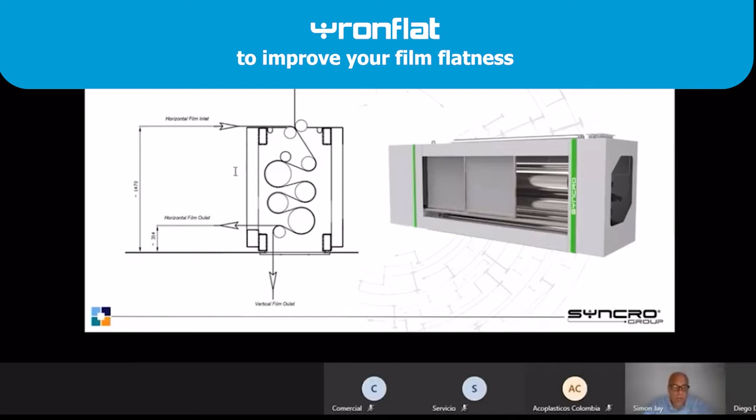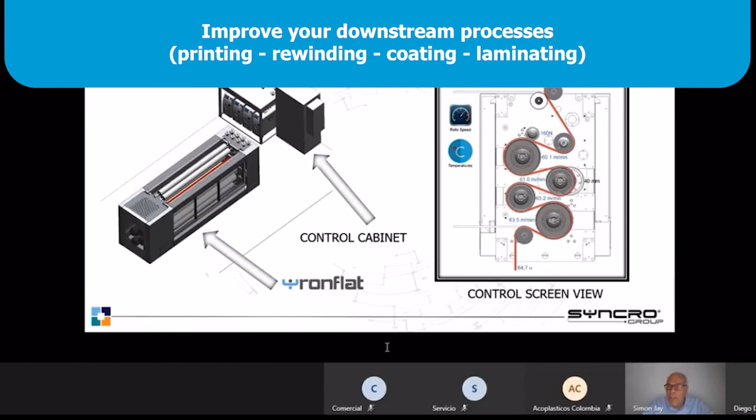And here you can see the key components. You have the 4 TCU units to control each roll individually for temperature. You have the control cabinet and the Yronflat itself. And on the right hand side you can see a control screen view where you can change the temperatures, the speeds, etc. to give you the orientation that you desire.

The final product I'd like to take you through is our EYES system. So the EYES is Syncro Group's web inspection system. This is able to detect all forms of defect that may occur during film extrusion, film converting or non-wovens. The EYES guarantees 100% detection of surface defects for all film types, i.e. transparent, opaque, coloured, and it can run up to 1000 meters a minute and resolutions down to 25 microns.

The EYES system allows the producer to improve their film quality by removing or detecting film contamination and providing a premium quality product to their customer.

These are the types of defects that you would be able to detect, so fish eyes, bright gels, paraffin or splashes, insects, scratches, die lines, bubbles, holes, particles or wrinkles.

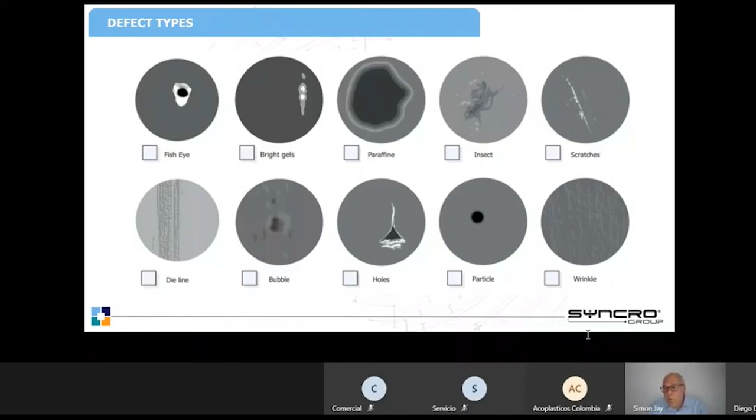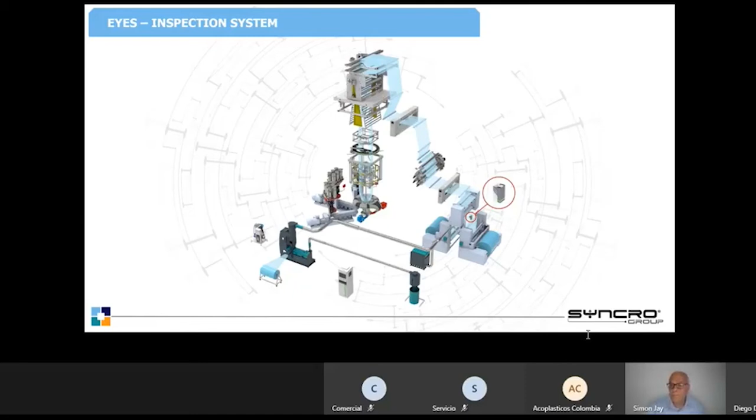The final thing I want to talk to you about is service. I'm a firm believer that the salesperson sells the first machine, but your service and support sell all your subsequent machines. One of the things that Syncro can offer is our spares on the web package.

Every single machine that the Syncro Group sells has its own unique QR code. When you scan that QR code, you go directly into the Syncro Hub, our dedicated web portal. Once in the hub, the customer will have direct access to their machine, allowing them to download manuals, electrical schematics, maintenance tutorials, plus they can select any spare part they require and will directly email them a quotation.

When the customer enters the hub, they'll go into their profile. Here they'll be able to select the machine that they wish to investigate, if they have multiple machines, for instance. Then they can drill down into that machine. This will tell them the serial number, when they purchased it, the hours of assistance they've had so far, and the pieces that they purchased, so the description of the equipment plus any attachments for that equipment.

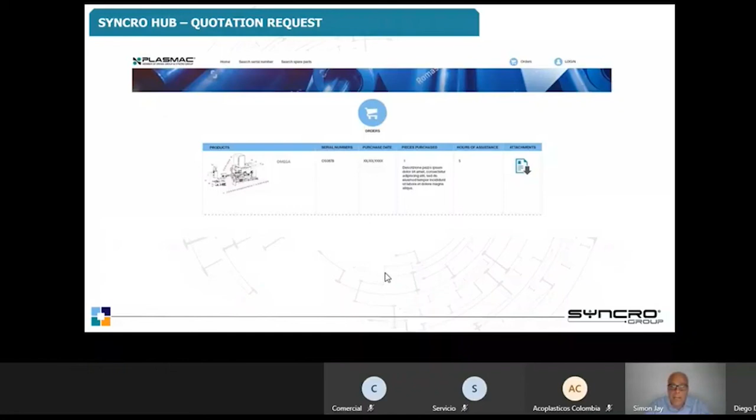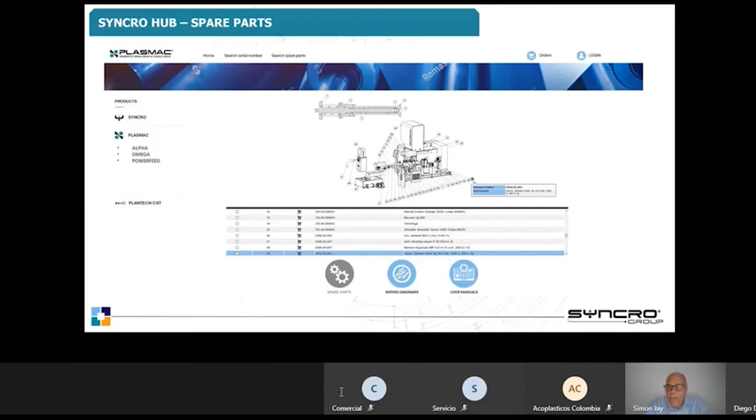And then when they drill down one level further, they can actually go into exploded diagrams of each and every component on that machine, so they can identify the exact spare part they require, and they can then put that into their order basket and order it directly from us.

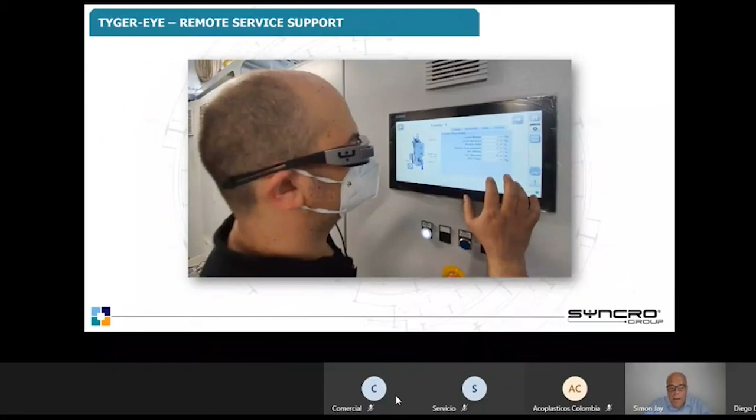The other product that we've just launched, driven primarily by the COVID situation, is remote service and support. How can we support our customers in these difficult times? Basically, we have a remote assistance software package designed using smart video glasses. This allows the customer's technical team or operations team to link directly to the Syncro group experts.

Information and instructions can be passed visually and verbally by a two-way system, and we can basically remedy even the most complex of issues. The remote technicians can even send documents and user guides straight to the inside of the smart glasses, so the operator will physically see instructions appear, literally like a heads-up unit appearing directly before their eyes.

What it allows us to do is live video and audio streaming over and above the glasses. You will also wear earplugs so that we can talk to each other. It allows us to share documents and images. We can instant message, and we can do video recording.

We can capture images and screenshots, and we can even highlight parts that we need the operator or maintenance manager to look at. So we can take a screenshot, draw a circle around it, and say please check this contactor, please check this display on the inverter, for instance.

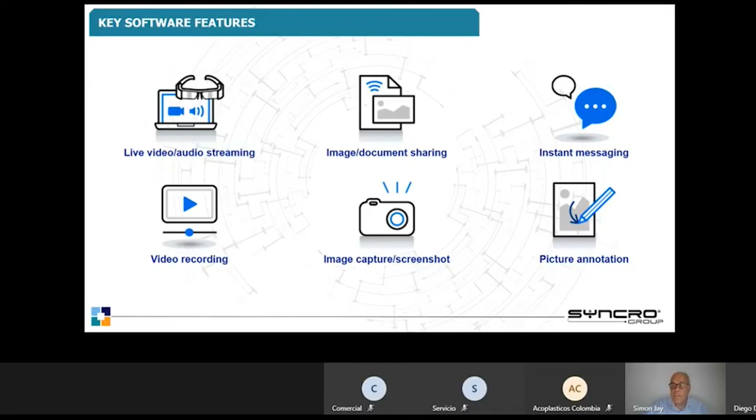The benefits are a very fast response time, much higher productivity, and minimized travel costs. If we can help you remotely, we don't have to send an engineer to site, and it removes the cost associated with that. But in this day and age, even being able to get an engineer to site is a challenge in itself.

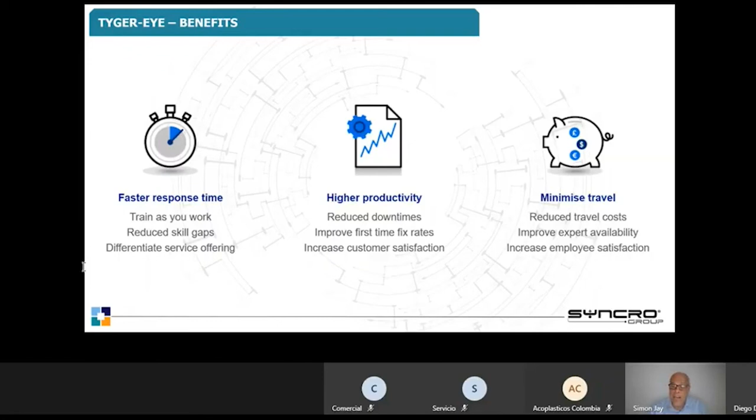Thank you very much for your time, and I'm now happy to answer any questions that you may have.

Simon, thank you very much. Now we are going to start with the questions. We have one here that says, what levels of contamination in printing or laminate terms can a Plasmac equipment handle?

We've supplied systems that can handle up to 100% print coverage. Here we would use a dual venting system to remove the ink, so we have done systems up to 100% ink coverage. In terms of contamination, if it's highly contaminated, then we would normally recommend either a hydraulic screen changer or a fully automatic back flushing screen changer. This would allow you to remove the highest levels of contamination possible.

Okay, we have another one, and it says, does Plasmac equipment have FDA grade approval?

We have customers that use it within the food packaging industry. I'm not sure if they have FDA approval. I believe they do, but rather than giving a definitive answer, I'd be happy to check with them and answer that question via email to confirm it. But certainly our equipment is used very regularly in the food packaging industry, so my assumption would be yes, that it does.